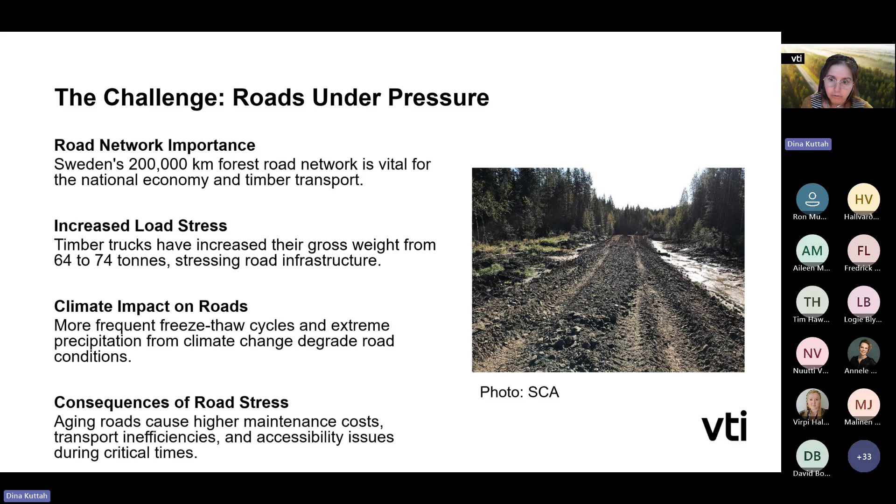Many forest roads were built according to older design practices and can no longer meet modern demands. The result is higher maintenance costs, reduced transport efficiency, and serious accessibility problems during critical periods, especially fall and spring seasons. So the aim of this project was to identify solutions that are scalable, quick to implement, and resource efficient. Instead of treating surface problems like potholes, we focused on strengthening the fundamental structure of forest roads from design and construction to operation and maintenance.

This project is one of the forest industry's largest recent investments, and our goal was to explore how forest roads can be built smarter, stronger, and more sustainable.

This 3-year project was coordinated by VTI and carried out together with 11 partners from Sweden. Key participants included the Forest Research Institute of Sweden, Kopparforsskogar, Stora Enso, SCA, Sveaskog, Holmen, the Swedish Forest Agency, the Swedish Transport Administration, Riksförbundet Enskilda Vägar, and Södra. Funding came from the forest industry with other actors and Vinnova through the Infra Sweden program.

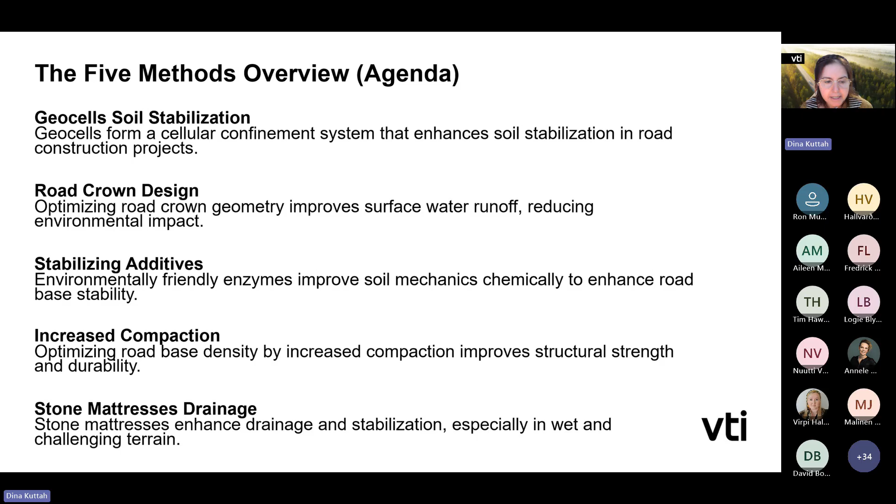We will dedicate about 5 to 10 minutes to discuss each method. But before that, I would like to talk about the assessment that we used and adopted to assess the conditions of the developed road sections and the reference sections.

One of our key tools was the lightweight deflectometer test. This is a very simple test, as you see in the photo. It applies an impact load on the road surface and measures the resulting deflection. There is an embedded equation on the instrument that will measure the deflection modulus from the measured deflections. This deflection modulus is a measure of the bearing capacity - higher modulus means higher bearing capacity.

The second measurement is the profile measurement. We also performed this using laser leveling, as you see in the photo, to capture the cross-sectional shape of the road, crown height, side slope, rut depth, and surface irregularities. Repeating this measurement over time helps us monitor how traffic and climate affect the road geometry.

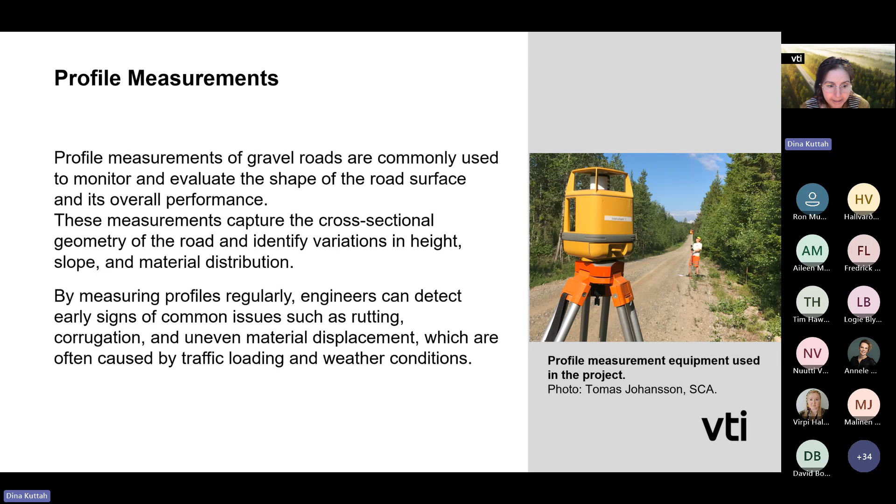The third assessment method is the cheapest one, the visual inspection. By walking or driving the road, we recorded signs of surface damage, drainage problems, structural weakness, potholes, corrugation, lost material, or uneven areas. We also examined ditches and side slopes closely.

To evaluate this method, we decided to carry out a cost-benefit analysis, as the construction cost per increase in bearing capacity. This analysis was mainly based on data from the lightweight deflectometer test because we could quantify the data in terms of EVD, the deformation modulus.

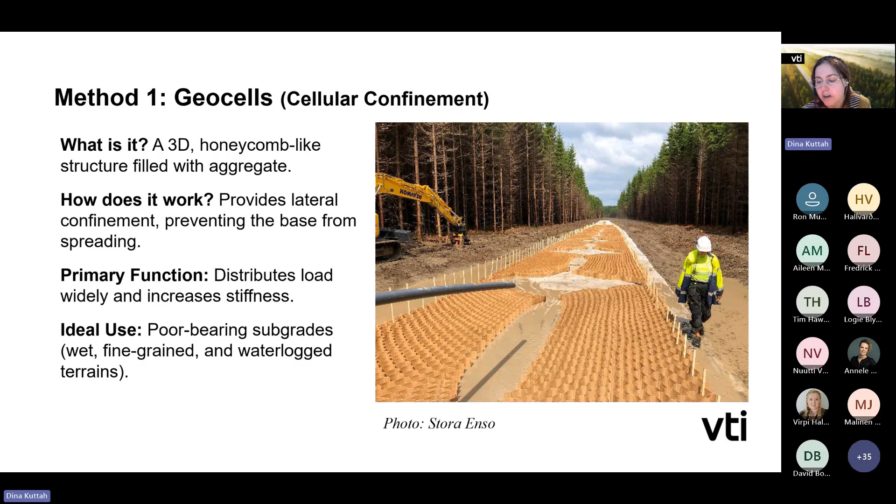So let's move forward and talk about the first method. As you see in the photo, Stora Enso implemented geocells, a highly efficient technology providing strong lateral confinement. These three-dimensional cells, or honeycomb structures, lock the granular material in place, preventing sidewise movement and greatly increasing the stiffness of the roadway. They are especially useful on weak subgrades such as fine grain soil or, as you see here in the photo, waterlogged terrains.

I'll show you now a short video demonstrating the installation of these geocells. Let's go ahead.

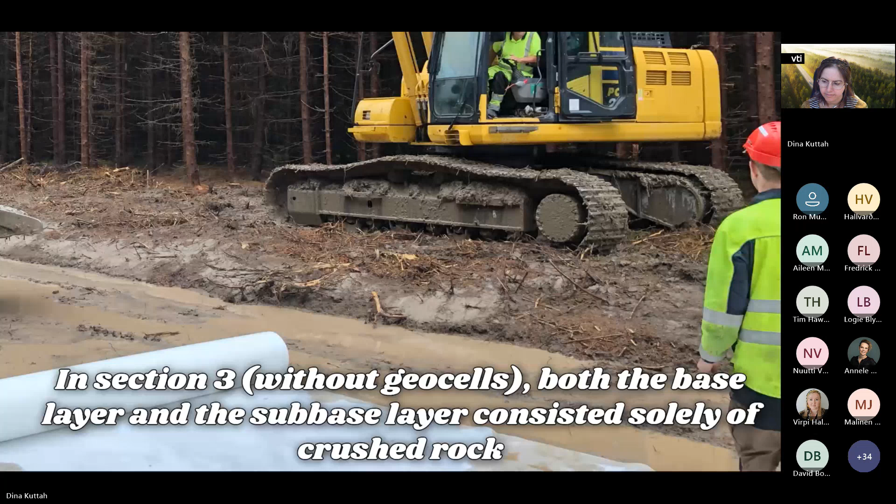This is the first section we tested, the geocells filled with crushed stones. In this project with Stora Enso, we tested 3 structures: 1 reference and 2 reinforced with geocells. This is the second section, reinforced with geocells, filled with existing material. This is the reference one without geocell.

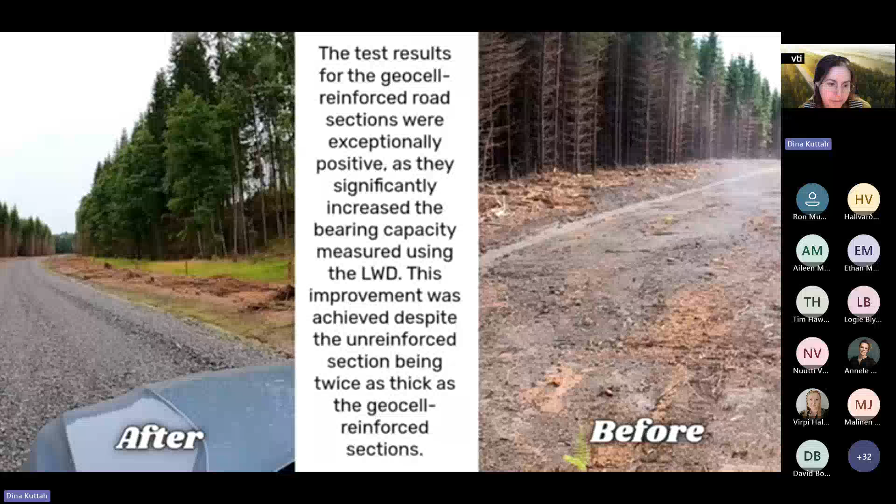Geocells are proven to be the most cost-effective solution tested. Here I'll give you detailed information about the results.

The geocells improved the load bearing capacity by 52 to 64% compared with the reference section, and made it possible to build a stable gravel road over waterlogged terrain. The 52% gain in EVD was for the section filled with pure gravel, and the 64% is the one filled with the existing material on site. So overall, these two sections delivered the highest increase in bearing capacity per construction cost unit, and were the strongest performers in the project.

Let's move to the second method, which is the improved road crown design, stated by SCA. This method focused on optimizing the road's cross slope to ensure efficient surface water runoff. We tested several configurations to identify the slope that maximizes drainage while maintaining safe and stable driving conditions. So we tested crown slopes of 10%, 5%, and left the reference one flat without any slope, just for comparison.

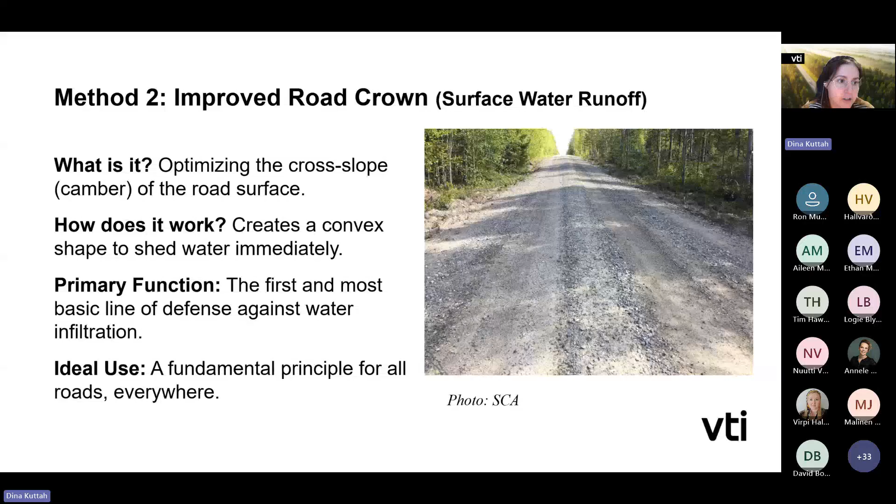So here you can see a brief video showing the design and maintenance process. Let's go ahead.

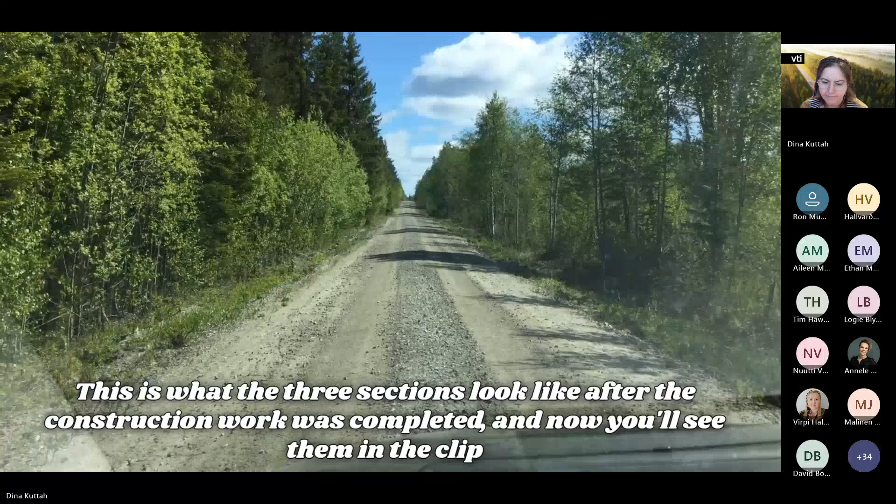This is the first section with 10% crown slope. This is the second section with 5% crown slope. This is the third section, the flat one with zero cross slope.

I would like you to focus on this, the longitudinal cracks. This is the first time maybe you see longitudinal cracks in a gravel road. Look here, in the middle.

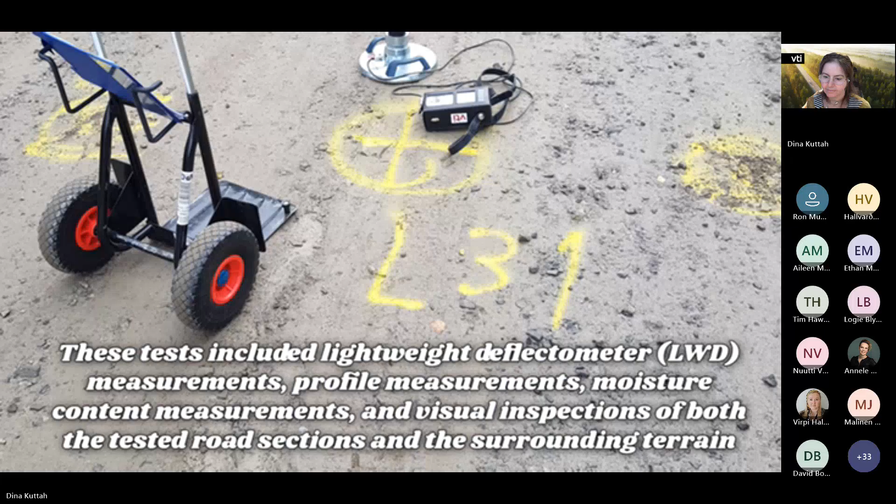This is the lightweight deflectometer test. Usually the first three drops are just to set up the instrument, and the next three drops are considered to define the LWD modulus.

So let's talk about the results. The results confirm the importance of these fundamental road engineering principles. Sections with properly maintained or improved crowns perform significantly better. The 10% and 5% slope sections outperform the flat one, which quickly developed cracks and irregularities.

We identified the 4 to 5% crown slope as the optimal choice, even better than the one with 10% slope. The one with 10% slope was uncomfortable for cars. The lightweight deflectometer testing could not reflect the performance of these sections, while here the visual inspection captured the performance clearly.

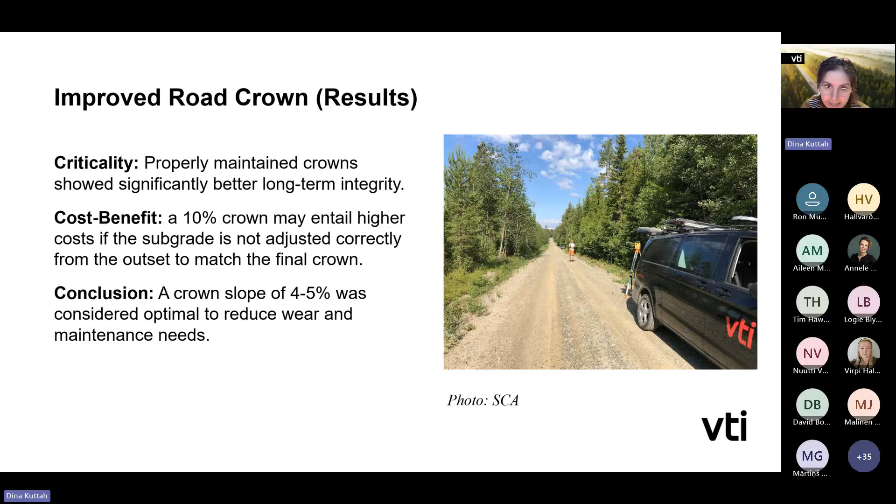So this is all about the SCA project, and let's move to the Holmen project. Holmen tested environmentally friendly enzyme additives that chemically modify soil behavior, particularly in clay and silt. Enzymes are biocatalysts that increase the rate of chemical reaction without undergoing any change themselves. So this chemical reaction in the soil surface results in increased density of soil and thus less water retained.

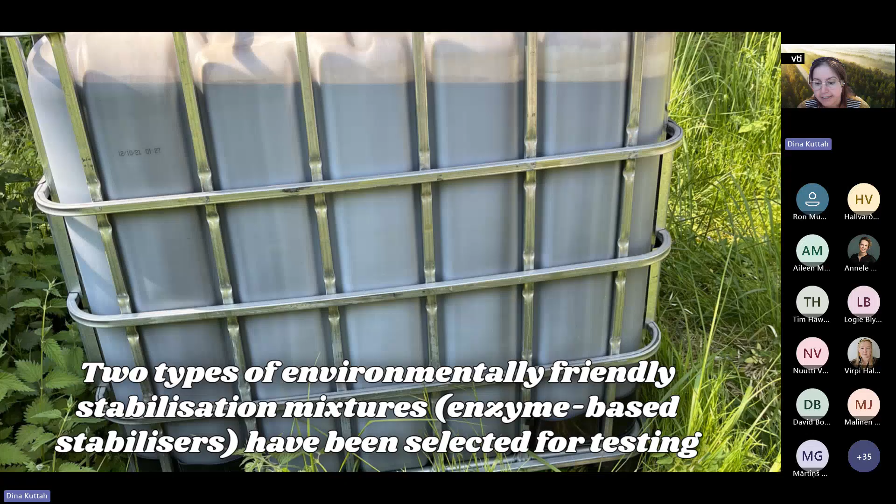So let me show you a short video about the construction process. Here we tested 3 sections. One stabilized with TerraZyme from the USA. The other stabilized with a mix of road stabilizer and dust blocker, which we imported from Finland, but originally they are from Canada. The third section is left unstabilized.

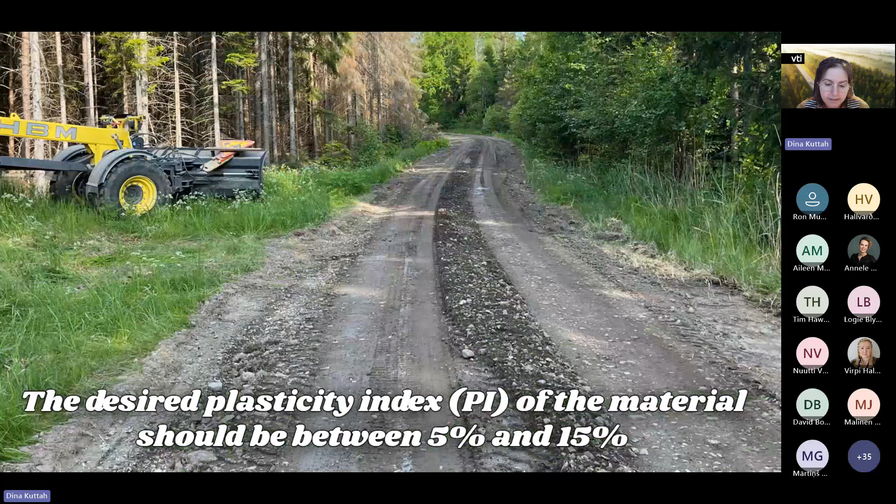There are certain requirements on the materials to be tested. It should have high fine content, clay particles, and the plasticity index should be between 5 to 15%.

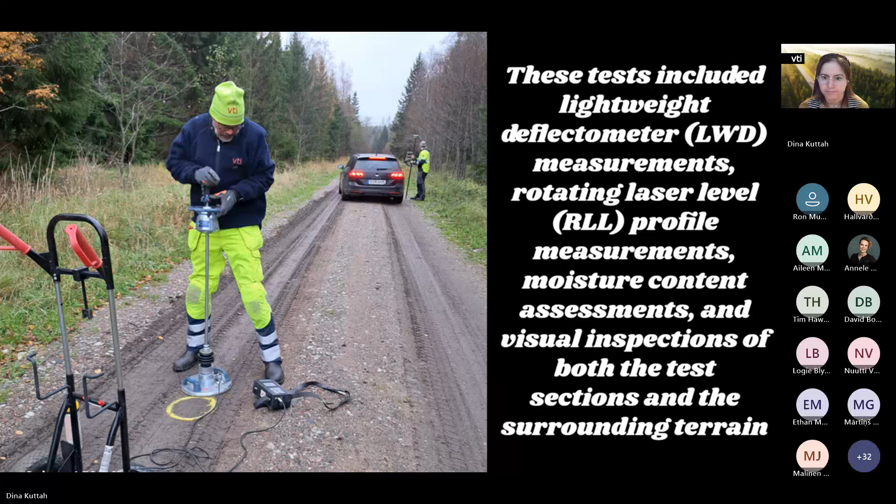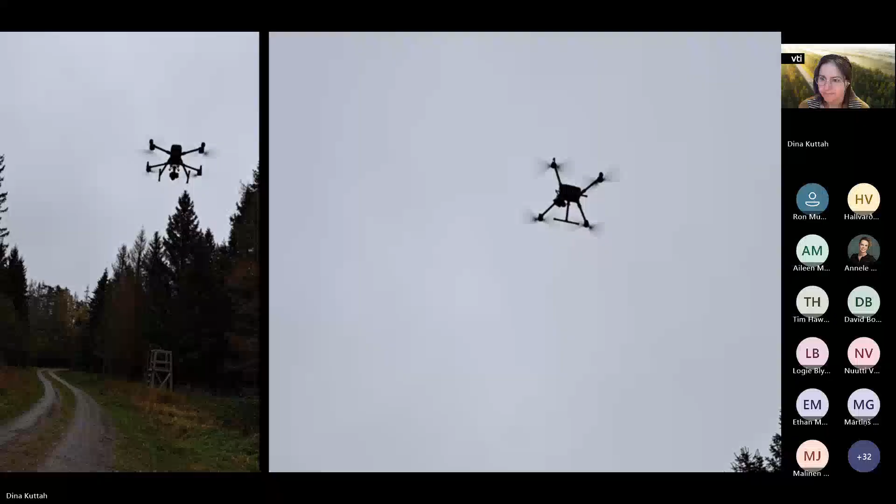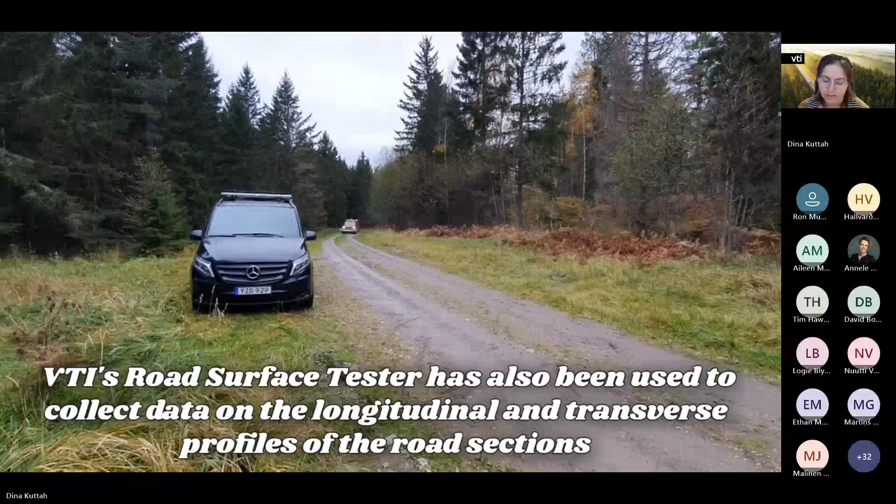Here, for the first time globally, we used an advanced drone to capture the profiles. We also used the road surface tester to have an idea about the texture and other measurements.

So let us talk about the results. The enzyme treated sections showed an improvement in bearing capacity. The section stabilized with TerraZyme achieved about 11% increase in deformation modulus, while the one stabilized with a mix of road stabilizer and dust blocker achieved about 17% increase in bearing capacity, but required transporting large volumes, which significantly increased the cost.

The dust blocker is not an enzyme, but it's a surface sealing material to control the dust. The expert from Finland decided to mix it with the road stabilizer to get a better result. This was correct. We measured higher bearing capacity, but this came with an increase in cost.

On the other hand, the section with the road stabilizer and dust blocker reduced dust levels for several months, as we were informed by the project leader from Holmen. Of course, this is good for health and safety, but these benefits were not included in the cost-benefit analysis that we carried out, though of course it should be considered in the future.

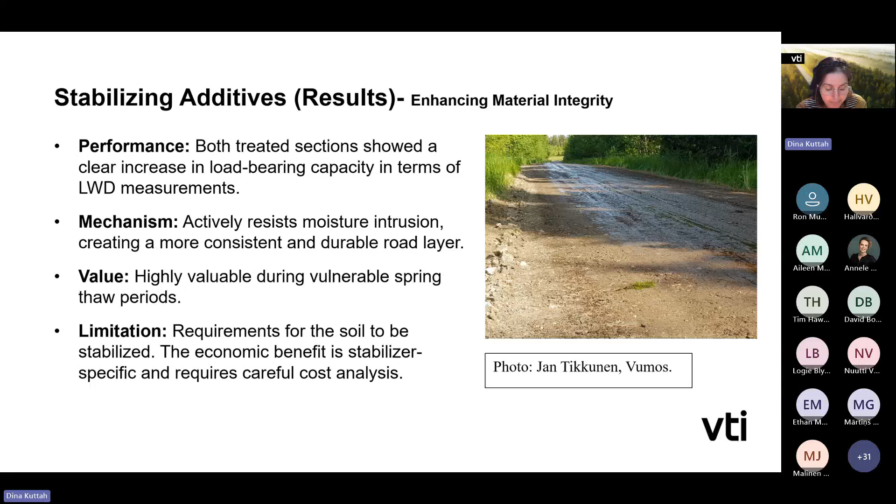Now we moved on to the fourth method that we adopted in our project: increased compaction. This method focused on increasing the compaction effort, and it was tested by both Sveaskog and Holmen using different types of compactors on different materials. The goal was the same: to deliver more energy into the road material and achieve higher final density.

As you know, a denser material should lead to a stronger and stiffer road with reduced water permeability. We applied this approach on both clay-rich soil with Holmen and sandy material with Sveaskog to understand in which condition higher compaction can result in improved road performance.

Before moving on to the results, I'll show you a short video about the construction process.

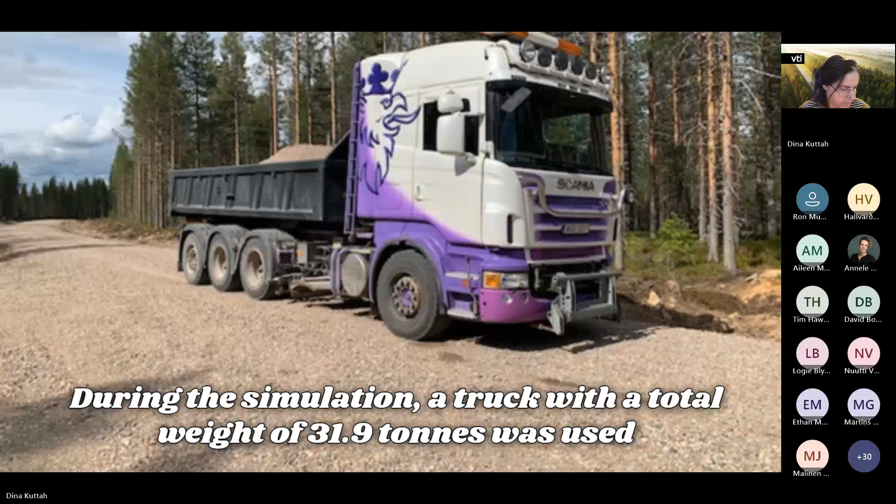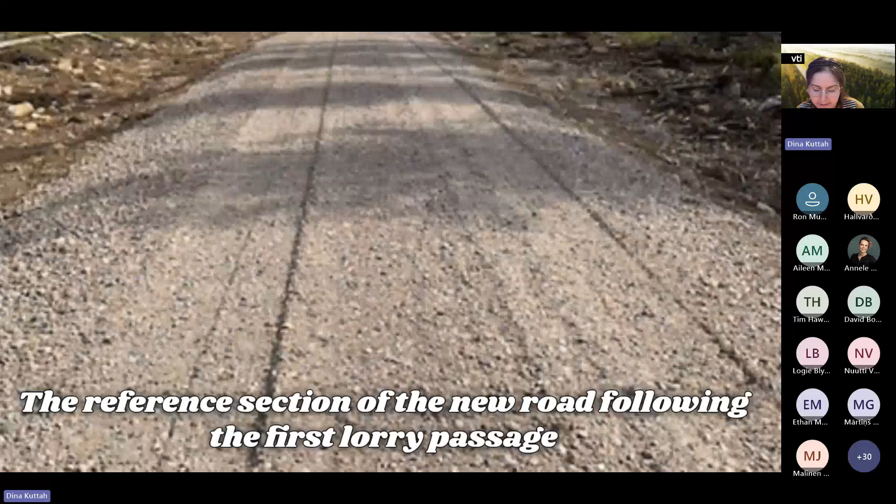We tried this method with Sveaskog on a newly constructed road and on an existing road. So we tested four sections: two newly constructed, one reference and one with higher compaction, and the same for the existing road, one left uncompacted and the other compacted by eight passes.

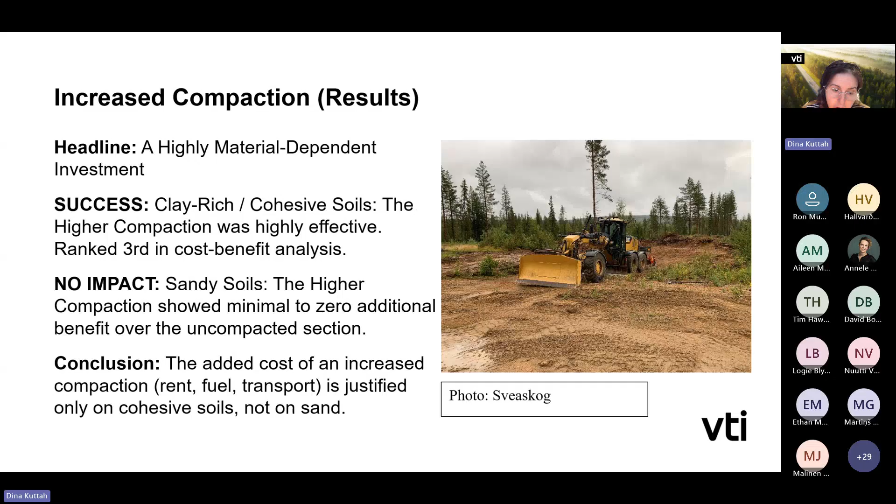Regarding the results, they showed a clear pattern. Increased compaction was highly effective on clay-rich soil, ranking third in our cost-benefit analysis. However, on sandy material, the one tested with Sveaskog, heavier compaction provided no improvement compared to the reference sections. Thus, the added cost is only justified for cohesive, silty, clayey materials.

Now we are reaching the final construction method, the last one. It's called the French mattresses, or the stone mattresses. This method was implemented by Kopparfors Skogar. We tested the use of stone mattresses.

These are structures of clean coarse stones, typically wrapped in geotextile, as you see in the photo, and buried beneath the road. These structures stabilize the base layer and create internal drainage channels, preventing mixing between the road structure and wet subgrade while allowing water to escape from one bank to the other.

So here's a short video showing the construction of the stone mattresses. Let's see.

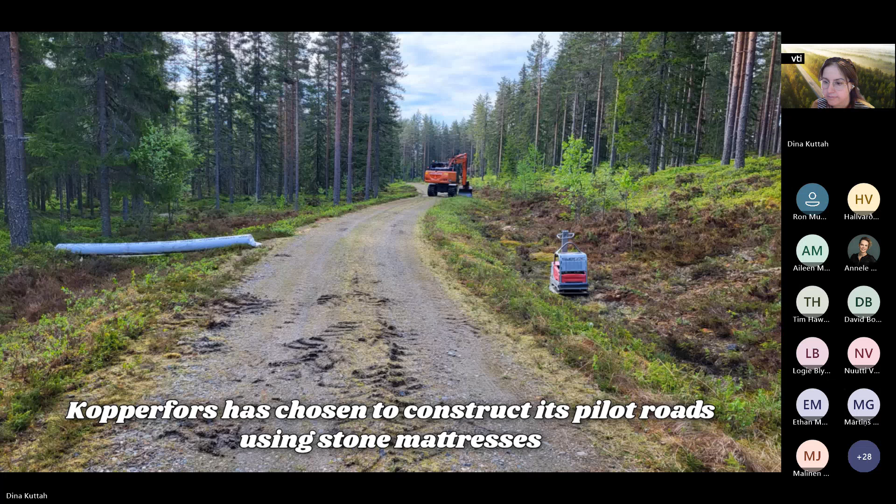The geotextile should overlap, it should be tight.

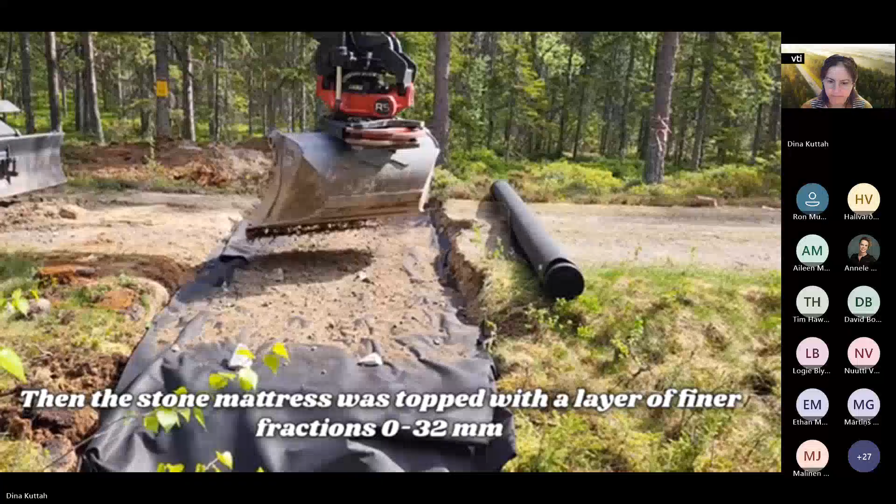The geotextile should be topped with a layer of fine fractions.

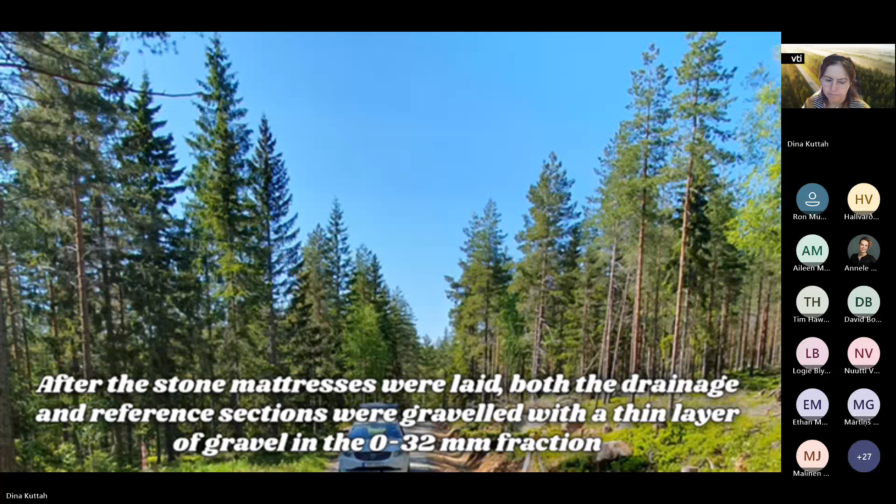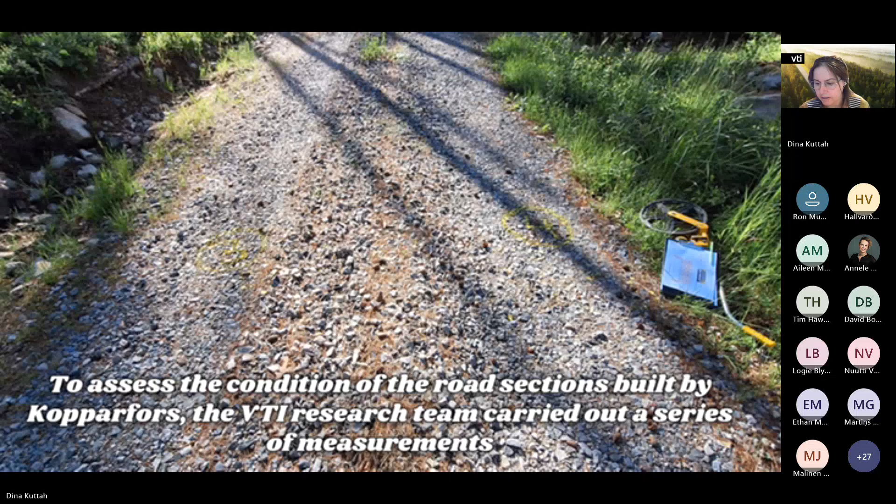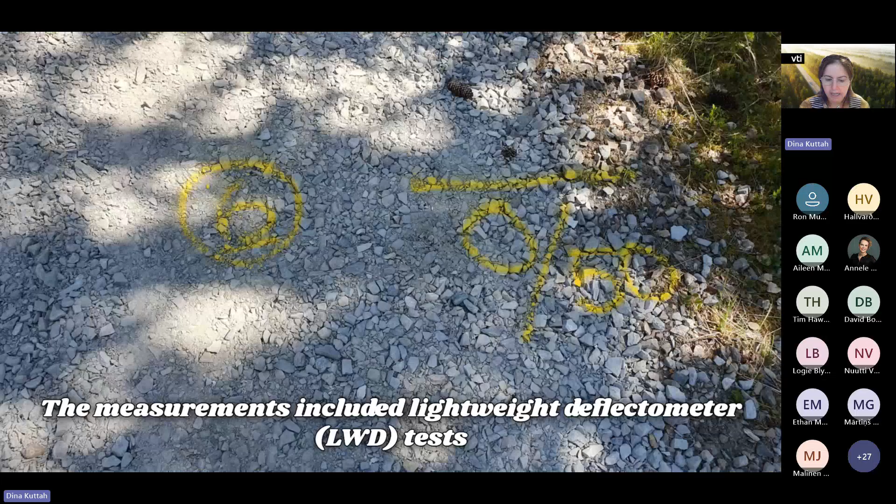In all these five projects, when we noticed that the traffic was not enough, we simulated the traffic. This is one of them. We carried out the same measurement immediately after the construction, and after exposing the roads to traffic simulation and the climate effects. I'll move to the results to save time for discussion.

We observed an increase in the road bearing capacity, and this was directly related to how and where the mattresses were placed. On test section 1, with a distance of 40 meters between the stone mattresses, the bearing capacity increased by about 12% compared with the reference section without stone mattresses. On section 3, where the distance between the stone mattresses was about 25 meters, the bearing capacity increased by 23% in the drain section as compared to the undrained one.

So this is all about our five methods adopted. Let us quickly summarize the critical findings across all five methods. The five methods showed positive results, with four methods boosting load bearing capacity by 10 to over 60%. Of course, the geocells were the clear game changer.

The increased compaction method is a specific investment. Higher compaction provides a strong benefit, but only on cohesive clay soil, not on sandy soil. And finally, drainage is non-negotiable. Both stone mattresses and proper crown design are absolutely critical components for ensuring our roads can stand up to climate change.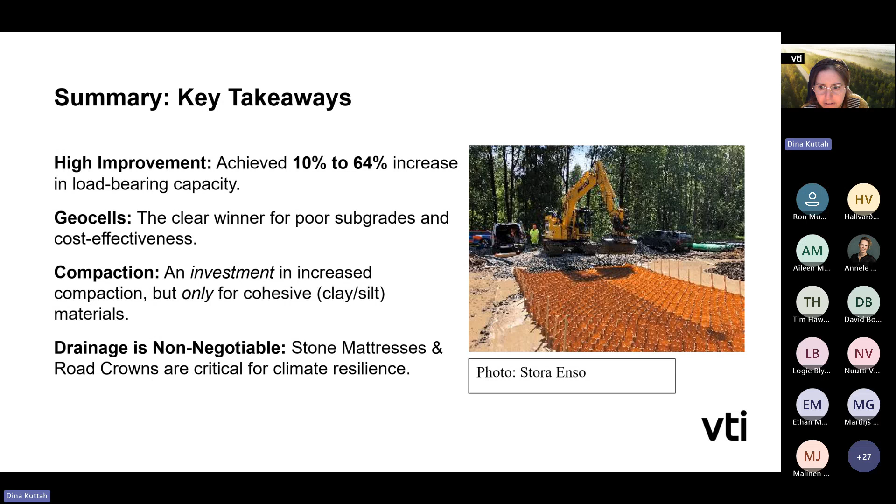Based on these observations, we have some recommendations. The main thing is: do not just pick a method, implement the right technology based on a detailed assessment of the subgrade soil. Use geocells in waterlogged terrains and heavier compaction for fine-grained soil. Integrate water management, this is key for climate resilience. Make sure you choose stone mattresses and optimal road crown design in all terrains with drainage problems, and terrains exposed to rainfall and thaw cycle problems.

You have to look at the big picture, adopt a mentality that the higher initial cost of an innovative technology like geocells, or maybe heavier compaction, is fully justified by the massive reduction you will see in long-term maintenance.

We have published up to now three articles: one related to drone technology for measuring profiles, another related to stone mattresses, and the third related to enzyme stabilization.